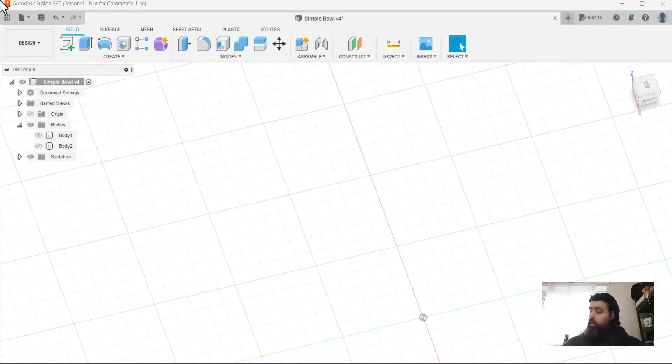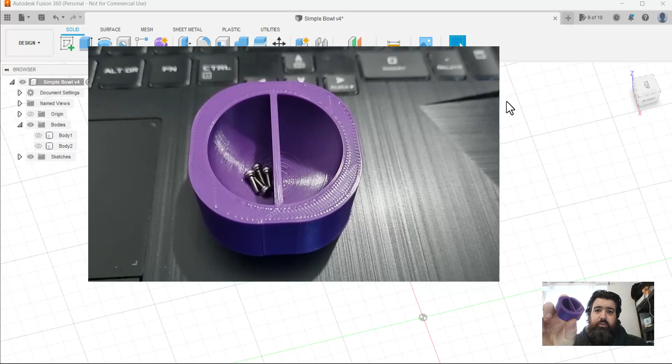Hi there. So I needed to make a pot to put my screws in because I'm forever losing them. I'm just going to make a little pot like this with a little partition in the middle, and I'm going to show you how to do it as well.

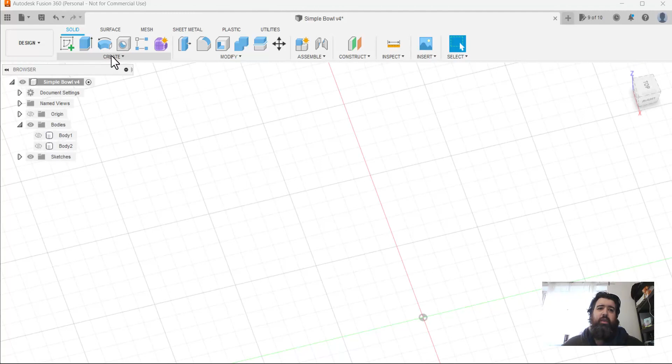So we are going to begin by creating a box. First of all, I'm assuming you've installed Fusion 360 before and that you've created something rudimentary with it. So assuming everything's installed and ready to go, I've created a new document called Simple Bowl. I'm going to click on Create here and then click on Box.

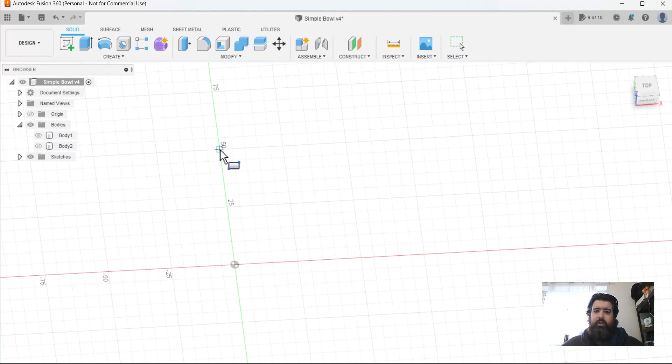You'll notice several planes are being highlighted here. I'm just going to orient myself properly. You can check your orientation with the cube in the corner right here, so if you're getting confused, that's how you fix that. I'm going to click on this plane here, which indicates where I'll be drawing. I don't want to create a super big pot, so I'm going to make it 50 millimeters by 50 millimeters, like so. Once the basic cube appears, you've got a couple of different options.

You can either type in your measurements manually. For example, I can type in 50 here and it will increase it to the size of 50. I'm actually going to create it as 25 instead, and then I'm going to click on OK.

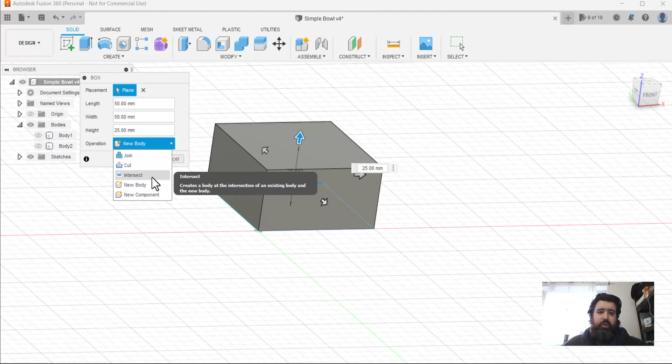Now you do have new body, join, cut, intersect. This allows you to subtract from other shapes, join to other shapes, etc. In this case, I'm just going to create a brand new body. So once that's created, I'm going to double click on the body and name it pot.

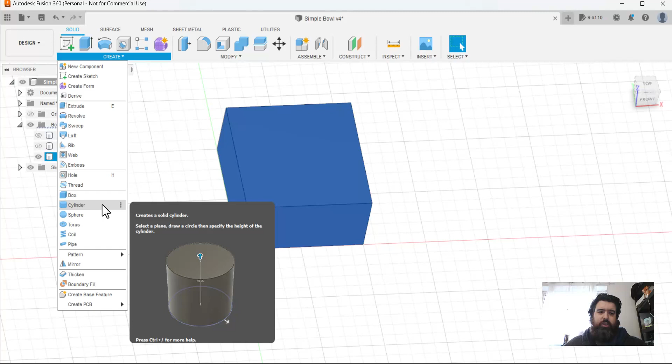Once we have our basic shape, we need to hollow it out so it has something to put the screws inside. Now there's a couple of different tools we could use for this. If you want a flat bottom, you can use a cylinder tool. If you want a curved bowl like I do, then we can use the sphere.

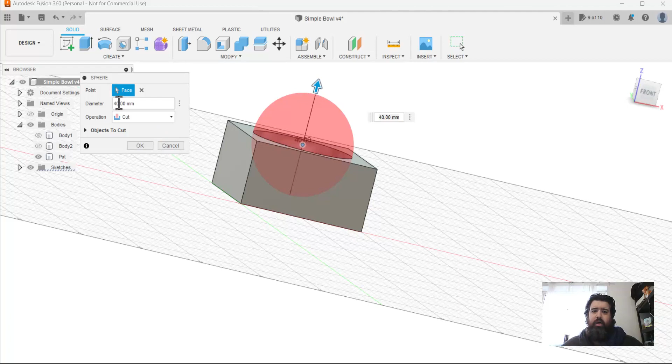So I'm going to use a sphere and click on the surface I want the sphere to be centered on, in the middle of the top surface there. As you can see, I now have a draw point and I can extend it out however I wish. It's set to 40 millimeters right now, but we can afford to be a bit bigger than that, so we'll try 45.

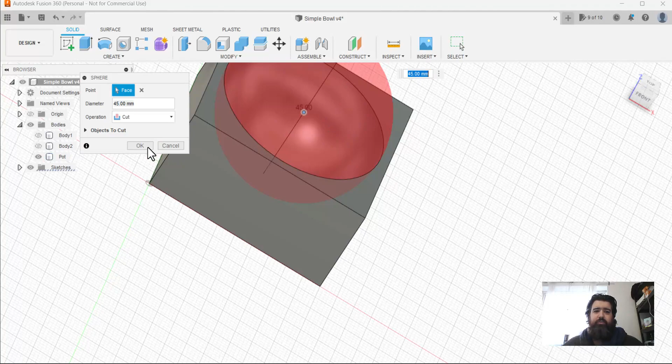The trick is to have the sphere relatively close to the bottom, but not too close, because we want some material between us and the side of the bed, especially considering we'll be 3D printing this. So we're on the cut operation here, which automatically subtracts this sphere shape from the box itself. Click on OK, and then we have that nice bowl indentation.

Now the next thing I want to do is bring in these corners, because as you can see on my little one here, I have that sort of curved shape rather than just a basic cube, which you can have as well if you want to put a lot of them together and fit them well, but I'm going to have a little bit of style.

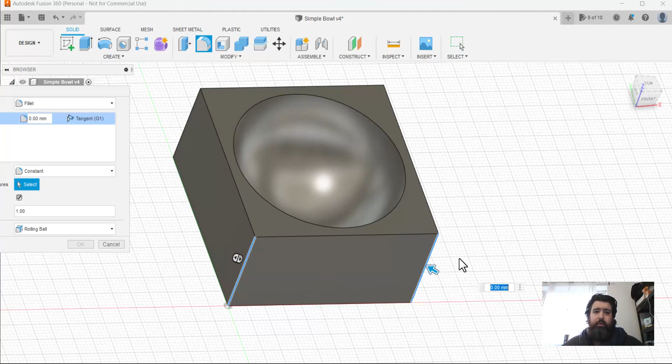So I'm going to use a fillet tool, and I'm going to do so by clicking on these edges here. I'm holding down the Shift key as I rotate around and click on the different edges. If you're wondering how I'm rotating my mouse, I'm holding down Shift, holding down the middle mouse button, and I'm dragging it on the page.

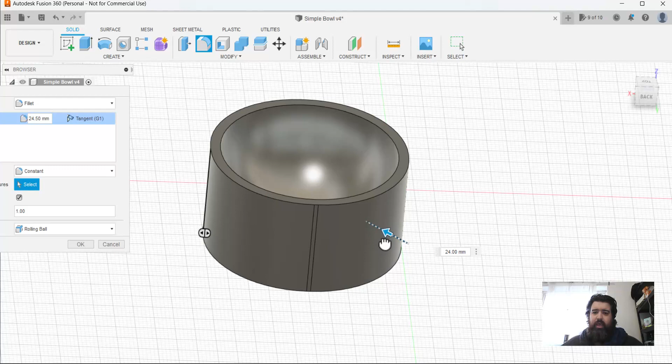Now I can grab this arrow here and start filleting it in as far as I want. If I do this, it will go to a complete circular bowl if you wish to. But if you just want sort of rounded corners the way I do, then you can drag it in as far or as little as you want. So you can have something with very slightly edged corners or something a bit more profound, which is what I'm choosing. I'm then going to click on OK.

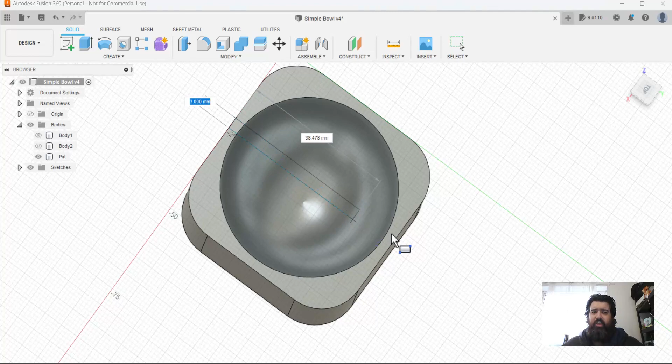I'm going to orientate myself above it and draw another box. So I'm going to create box, click on the top surface here, which is where I want it drawn, and draw from the edge, approximating the middle. Actually, I'm going to press escape. I'm going to try that again.

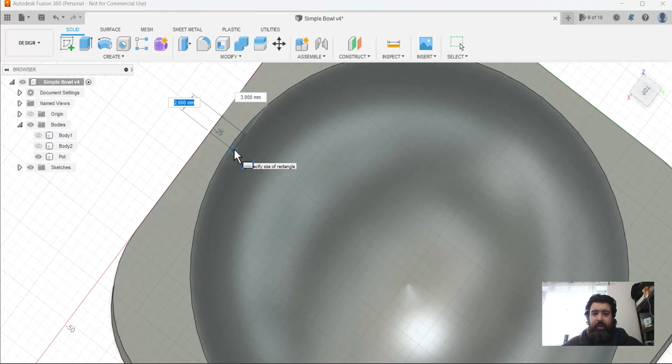So box, click, and this time I'm going to use the guidelines. I can zoom in here. This is centered, so I want this -25 guideline. I'm just going to make it 2 millimeters thick, which are these two blocks here, and then drag it all the way to the other side, and that will become our partition.

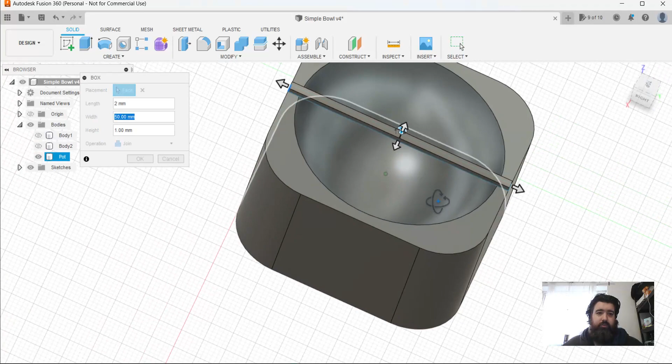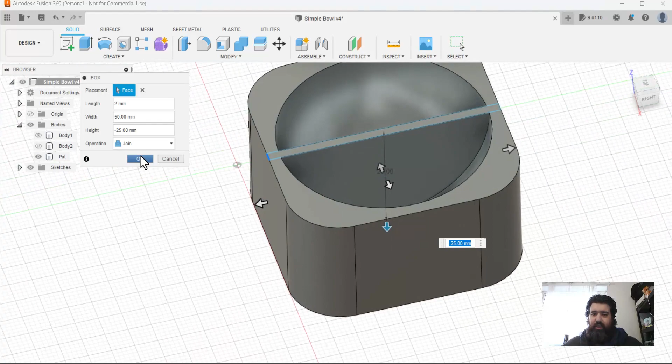Once I'm satisfied that everything is within the bounds of the box and there's nothing weird happening, I click on OK, and now that becomes part of the shape. Just like that, we end up with a little bowl to hold your screws and things in.

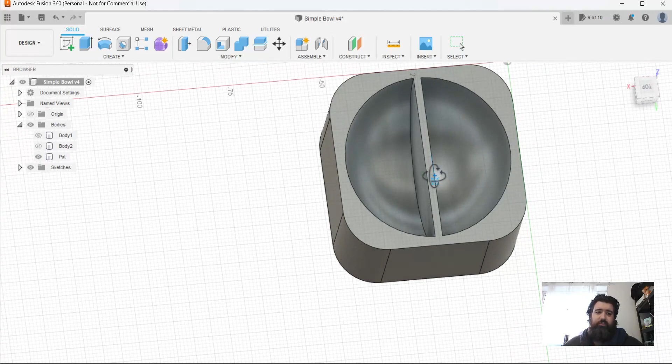Now, if you remembered, you could also have it flat-bottomed rather than bowl-shaped. Exactly the same instructions, the only difference is using this cylinder tool instead. If I was to mock that, I'll click on the middle the same way I did before, drag it out and drag it down like so, and cut, and now I'd have a much deeper, flatter bottomed container.

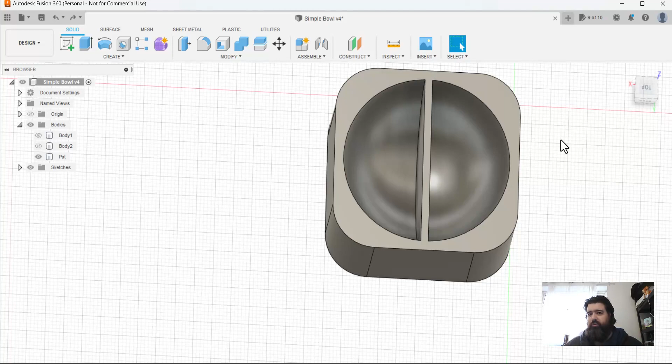Control Z to undo that, but it gives you some additional options. Now, of course, you could have this partitioned 4 ways, 3 ways, 8 ways, however many sections you want to put into this. 2 is fine for me, 1 for my bit, 1 for my screws. I tend to use M2 screws and a 2mm bit so I can keep those together depending on the project I want to work on, and it's that simple.

So yeah, we now have that ready to go. Now, to save this, what we need to do is just hit Control S on the keyboard, which will save it automatically, and then we want to export it ready for printing.

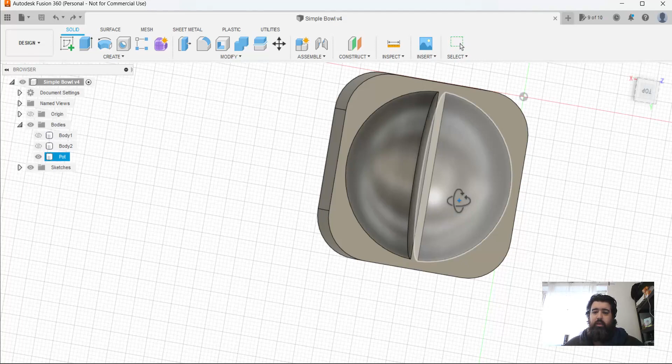And we do this by clicking on File, and then you can either use the 3D print option, which will send a file over, but I tend to use Export. You select STL file, which is my basic standard, and I click on Export. Now this will go up to the cloud and be converted, so I've got to wait for that procedure to happen, and once everything's been converted, we can then show in Explorer.

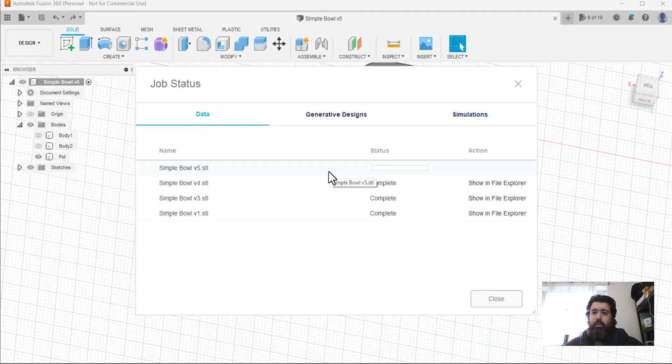As you can see, I've gone through various generations of this bowl. I'm just going to close down my print software. It does take a few moments for this to actually come back from the cloud.

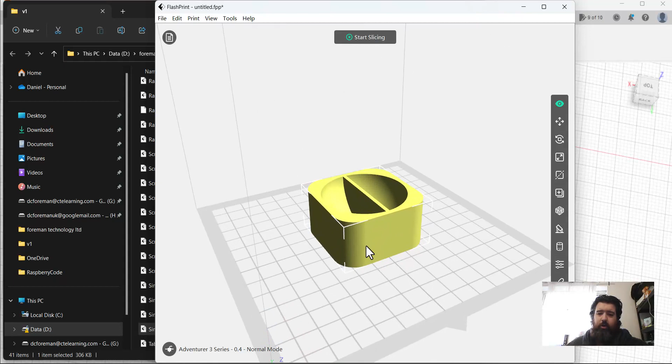In the meantime, so it all comes down in one go, we then click on Show in File Explorer. It will highlight the file you just created. Double click on it to open it in whatever slicer software you use. I use FlashPrint, which comes with my printer.

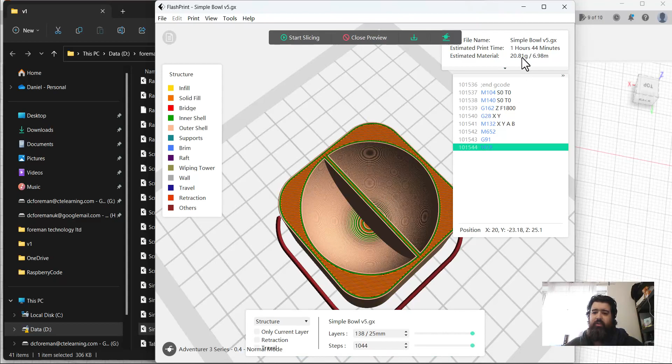And then we just start slicing. So once I slice, I tend to whack mine up to 230 because it's winter and it's a little bit cold. I don't need a raft for this because it's being printed directly to the bed anyway. Click on Slice, and this should take about an hour and a half to print out. So if you click on Slice Preview, there you go - about 1 hour, 44 minutes in order to get this basic container.

And that's it. You've made a very simple container that you can use. If you want to download my model, you can do so on my website.

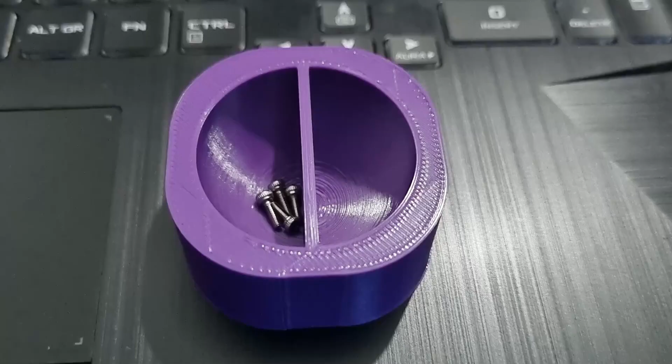The resulting print is this little pot. As you can see, I've put some screws in there already. It's got plenty of room for when I'm disassembling all my electronics, and because it's partitioned, I can also stick in my bit so I don't lose it. Now I have all my M2 screws organised and ready to retrieve at a moment's notice.